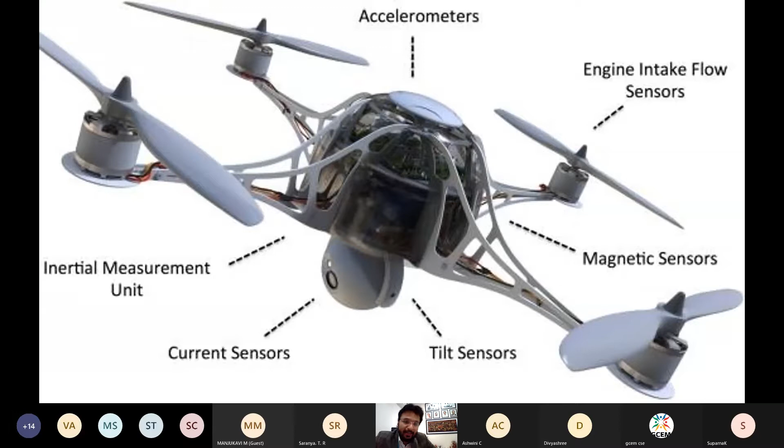Now, drones have got a lot of components in them. We will be seeing each of these components in some time, but I want you to know that it is not just what we see outside; the main components of the drone are the ones that we cannot see, that is inside the drone.

And my tryst with drones started in the year 2016; in fact, the work started in 2015, where I, I can't say manufactured because it is assembled, I assembled a few components and made a drone called seed sowing drones. This drone was launched in 2016, which had a lot of seed balls in it, especially seed balls from the Western Ghats. This drone had a camera, and from the ground station I could find out the exact location below. The camera would take the pictures and videos and send them.

And if the land was barren, then I used to just press the controller and the seeds used to drop there. Since the seeds were dropped from a height, they would penetrate about 5 to 6 centimeters inside the ground. And the seed balls were made up of seed, red clay soil, cow dung and cow urine. So this was a natural fertilizer and manure kind of a thing. And the plants used to grow really well because I had the map through which the drone used to traverse. And I used to send the drone once again every 15 days and take videos so that we could monitor how the plants that were sown were growing.

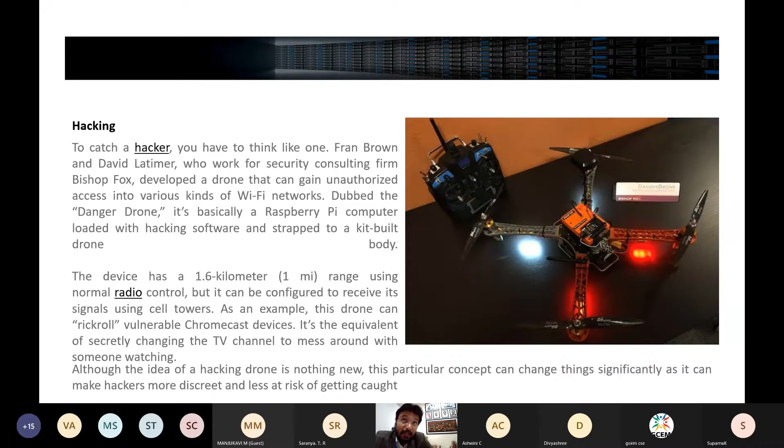So what it does is it sends reset packets, and when they are sent in the Wi-Fi network, whichever network you're connected with, you just get disconnected. And these people used to show a fake SSID, a fake Wi-Fi name, and they used to make people get connected to the Wi-Fi network, which was not encrypted. So anything that the person was doing by connecting to the Wi-Fi network, the drone used to capture the details. So this is how it is done in many places. So the drones can give a Wi-Fi network to a large area and steal the information.

And as you know, drones these days have also been procured by the ISIS. So the ISIS have started using drones, and recently, I don't know if you have heard of it, but in Saudi Arabia, in one of their biggest oil wells, drones came and they just attacked, and half of the oil wells was destroyed. So warfare drones are being used, and even for robbery.

See, for example, you have left your bag somewhere, a drone can come and just pick that bag and go. So pick and drop drones are available. These days they are assembled by high school students also, because we conduct programs for high school students, for PU students and degree students. Now the high school students identify how to assemble the drones, and pick and drop is one of the basic experiments that they do. So this way burglaries also can happen.

And you know that there are certain zones over which the drone should not fly. These are called no-fly zones, or restricted airspace.

But still, you can get some Chinese drones which do not oblige to these no-fly zone restrictions, and they can fly, they can capture sensitive data and things like that. And also, whenever a raid happens, a drone can come and it can spray pepper spray, or it can put some fog somewhere, and it can make sure that the accused can escape. So a lot of things.

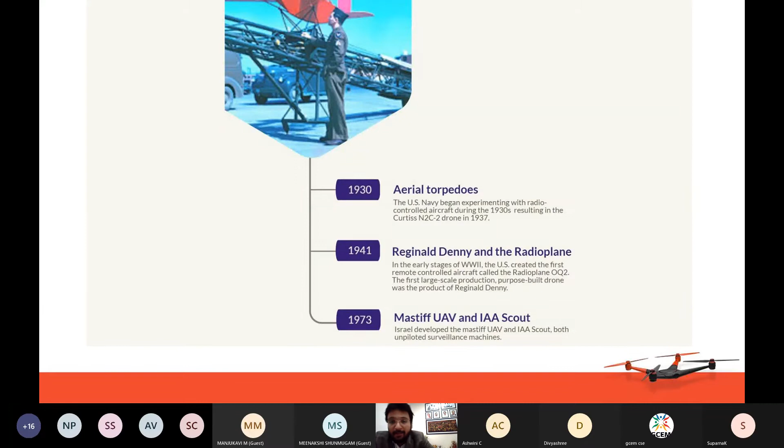Then the first major American unmanned vehicles were in 1916. Then the aerial torpedoes came. Then the Mastiff UAV came. In 1982, the battlefield UAVs came. So 1986 is where the reconnaissance drones came. Reconnaissance is a way in which you gather information. It was a joint project of the US and Israel, where they started gathering data.

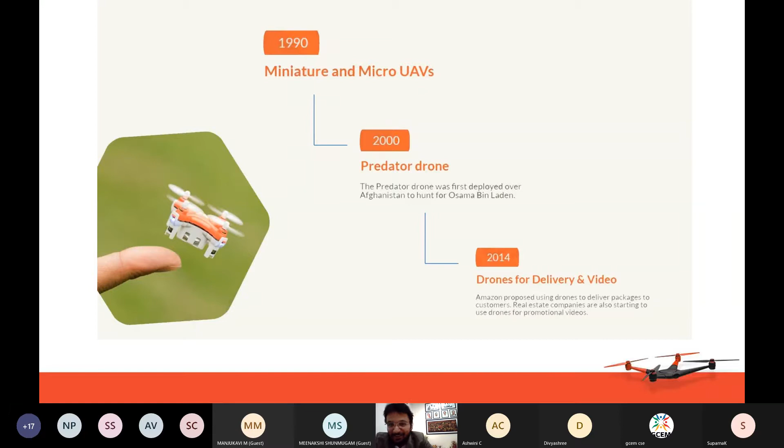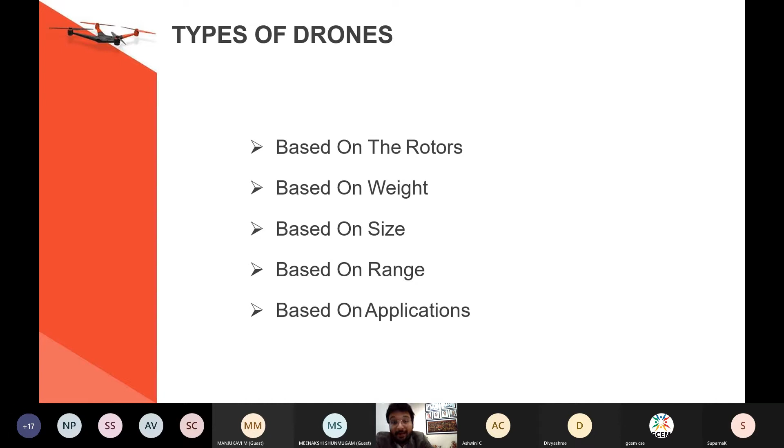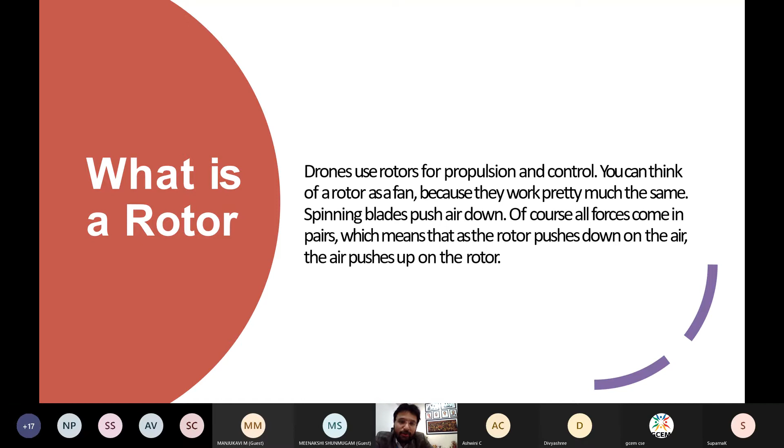But first, you need to know how drones are classified. They are classified on the following aspects: how many rotors they have, what is their weight, size, range, how far they can go, and what are the applications. So what is a rotor? A rotor is basically for propulsion and control. It's a fan. Usually the drones that you see have got 4 rotors, which some people call fans. They create thrust and make sure that the drone takes off.

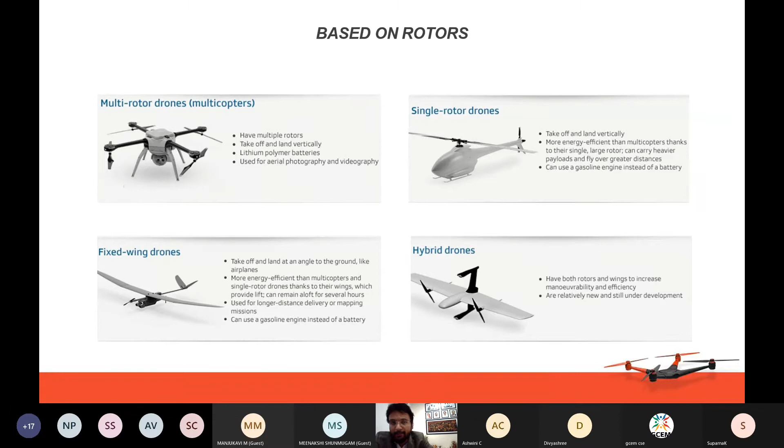Now look at these multi-rotor drones. You have drones with many rotors, single rotor, fixed wing drones, hybrid drones. Hybrid has a wing as well as a rotor. These are classified based on rotors. Then you have the ones based on weight: less than 250 grams, above 250 grams, less than 2 kilos, less than 25 kilos, and finally greater than 150 kilos. So these are the types of drones, especially in India.

Below 250 grams, you do not need a unique identification for the drones, and above 250 grams, you have to register on the Digital Sky platform. There is a platform in India called Digital Sky. So if you are using drones, it is better to go to the Digital Sky platform and register. Otherwise, your drones will be confiscated.

And based on applications, the drones can be mission drones, like military or civil, can be based on flight zone, that is indoor or outdoor, or based on environment: whether it goes underwater, on water, ground, air, space, things like that.

So these are the different types of applications, and finally based on size. You have very small, medium, and large. Very small is anything between 1 to 100 centimeters. Then you have the small UAVs, the medium UAVs, and the large ones. So this is on the basis of size. In meters, that's lesser than 1 meter, lesser than 10 meters, and lesser than 20 meters for the large ones.

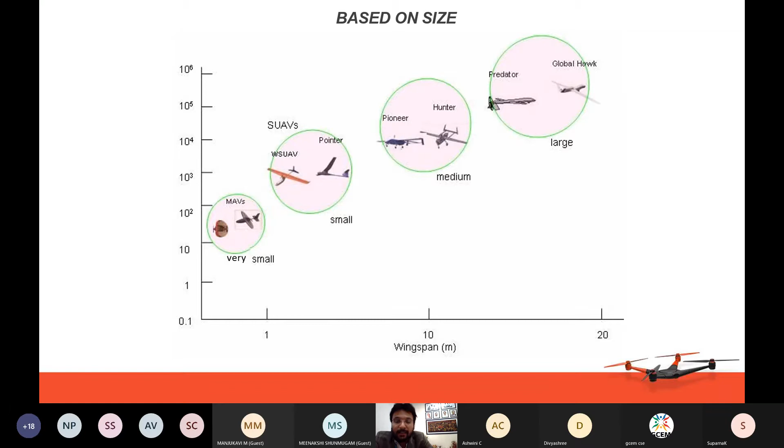I just wanted you to know how fast drones can fly. The ones photographers use, the DJI Mavic, fly about 42.5 miles per hour. The Stigg, one of the fastest drones, is about 128 miles per hour, roughly 200 kilometers per hour. You can just imagine the speed at which these drones fly. Usually the ones used for photography are about 40 to 45 miles per hour.

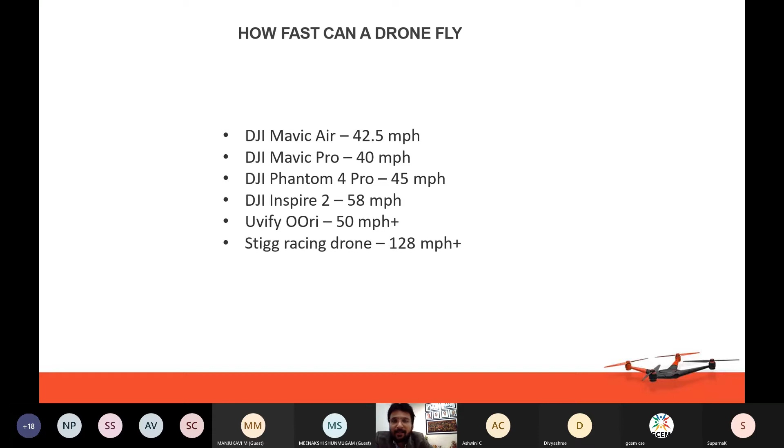These drones also have different modes. One is the normal flying mode, and the other is called the race mode, speed mode, or sports mode. Once you put it on sports mode, they behave totally differently, more like a race car that you need to control. So drones are fun to fly.

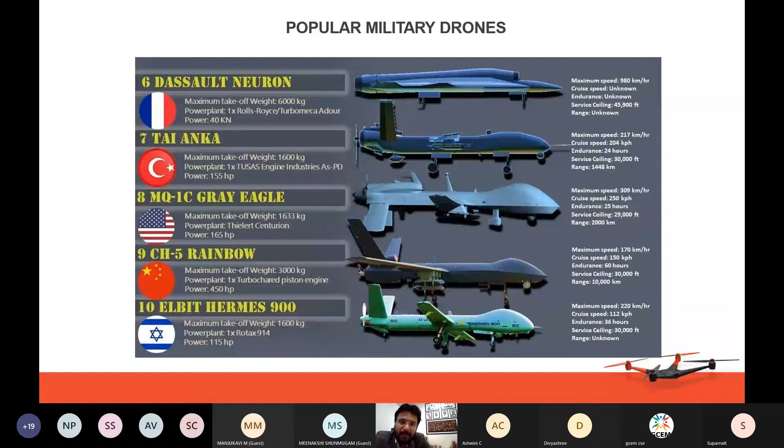Some of the most popular, fastest drones are the Dassault Neuron from France, which flies at 980 kilometers per hour. You can imagine the speed at which these drones fly. Unfortunately, Indian drones are not among the top ones. I hope and pray that we will have some of our own drones very soon. You have the Israeli Hermes drones, the Chinese Rainbow drones, Turkish drones, and the Gray Eagle drones and things like that. So many different drones are there. 980 kilometers per hour currently is the Dassault Neuron, one of the fastest drones.

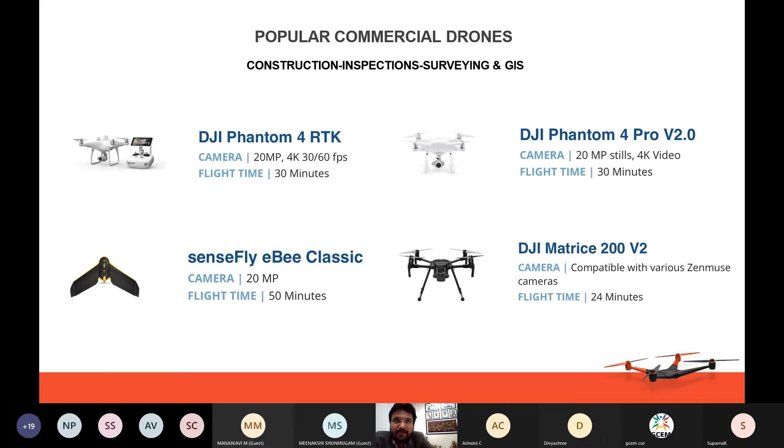Some of the drones used for commercial purposes like filmmaking are the DJI Mavic 2 and the Skydio. For construction inspections, earlier the contractor used to go up and come down every time, but now you don't have to do that. You can send drones to take pictures, reconstruct the site, check if things are fine, and even check whether the alignment is proper. You also have drones for indoor inspections like Flyability's Elios. For agriculture, drones are used for pesticide spraying, seed dropping, and checking for weeds. So there are many popular commercial drones.

Now the point here is, why do drones fly, or why does an airplane fly and cars don't? If you've sat on an airplane, before takeoff the plane goes about 100 to 150 kilometers per hour, and then it just takes off. But why don't cars take off when they go at 100 to 150? That's because of aerodynamics.

Usually cars are designed so that they don't take off, they don't get lift. They ensure the downward force is much greater, which is why the car stays kissed to the road and doesn't fly. Some fast cars, the race cars you must have seen, also have a special component at the back called a spoiler, and many put spoilers just for fun or just to make the car look aesthetically brilliant.

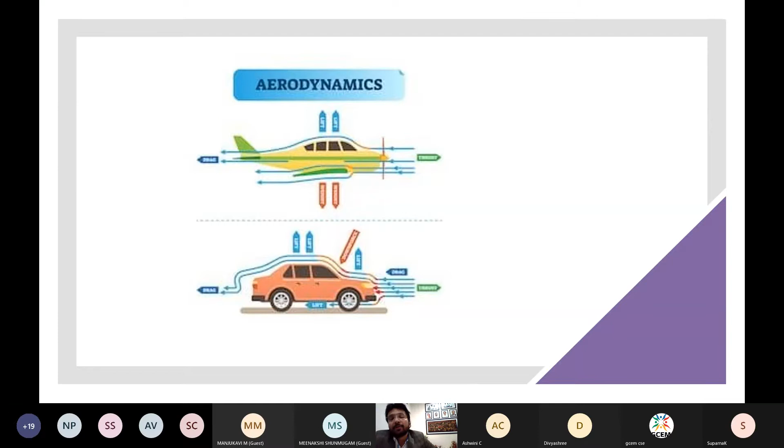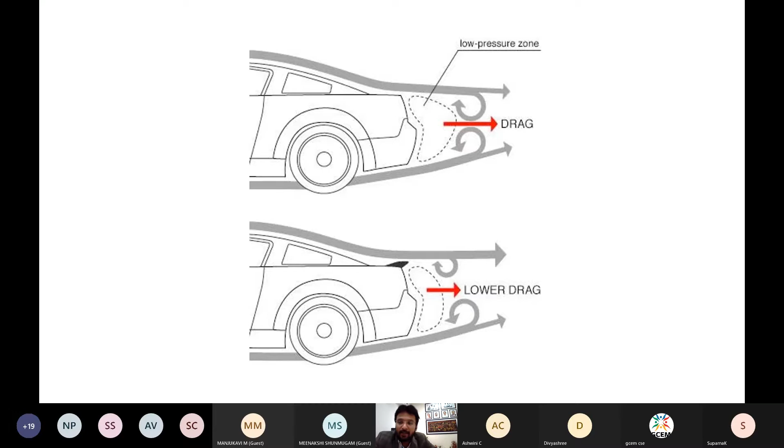Usually the spoilers are there so that the car does not fly at top speeds. So what we are basically doing is trying to lower the drag by the design so that cars don't fly.

For any airplane to fly, we need four forces that need to be balanced. The thrust which the engine generates moves the plane forward, and when it moves forward, there is a resistance by the air, which we call drag, that moves backward. As the plane takes off, the force is called lift, and the gravity that puts it down is called weight. So basically four forces: thrust, lift, drag and weight.

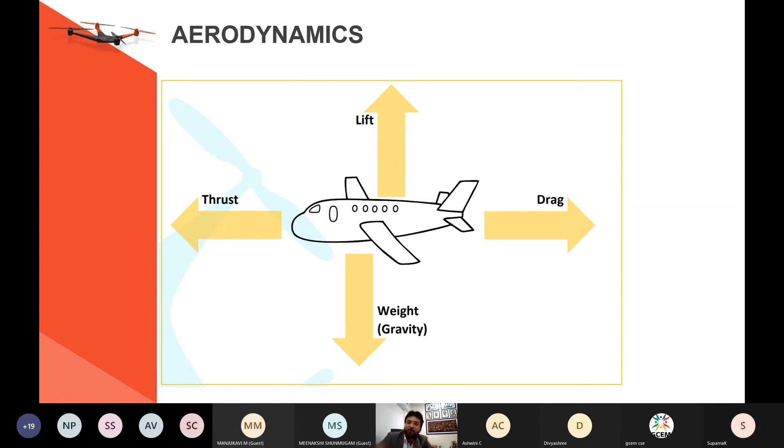I won't be getting into the details, not a physics class today, but I wanted you to know that only when these four forces are in equilibrium will you have flying. The same things are managed just with the use of rotors in drones. The forces remain the same because the laws of physics do not change whether it is a helicopter, an aeroplane, or a drone. But all these things are done just with the propellers.

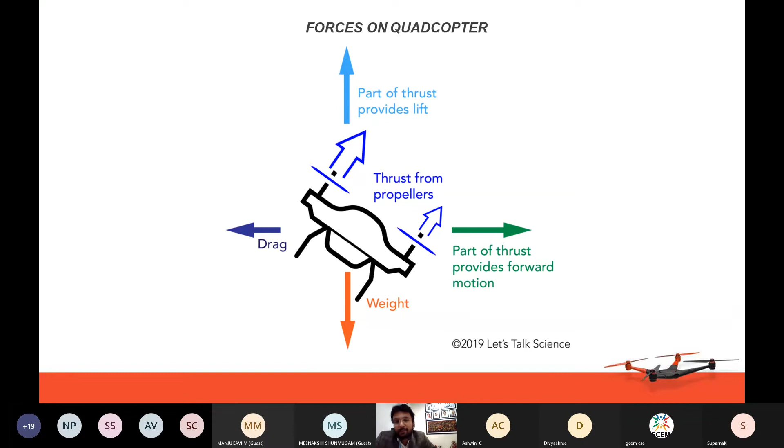The point here is this propeller is not only used to take the drone up, but the same propellers, just by their rotation, direction of rotation, and speed of rotation, can make the drone move left, right, backward, up and down. So all these things are possible just by the propellers. I want you to know the movements of the drones.

Drones have three movements: one is called pitch, second is called yaw, and the third is called roll. These are the three movements in the horizontal plane. Going up and down of the drone is the vertical plane, but we are going to talk about the horizontal plane, so that is pitch.

Pitch is basically moving front and back. So the drone moving front and back is called pitch, moving forward and backward.

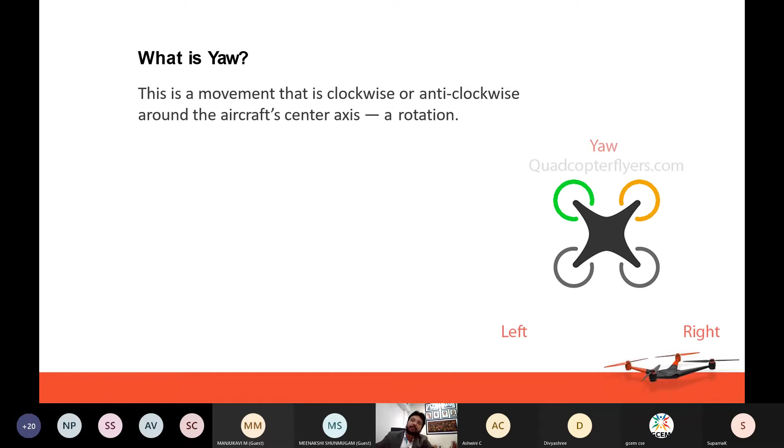Then you have yaw. Yaw is the drone moving in a clockwise and anti-clockwise direction. This is basically done in movie shooting. For example, you want to show a 360-degree or 180-degree panoramic photo, so the drone remains stationary and just rotates clockwise or anti-clockwise, taking pictures of the entire area. This is called yaw.

Similarly, you have roll, which is moving left and right. So we saw pitch is moving front and back, roll is moving left and right, and yaw is moving clockwise and anti-clockwise. These are the three movements, 3 into 2, so that is 6 movements of the drone.

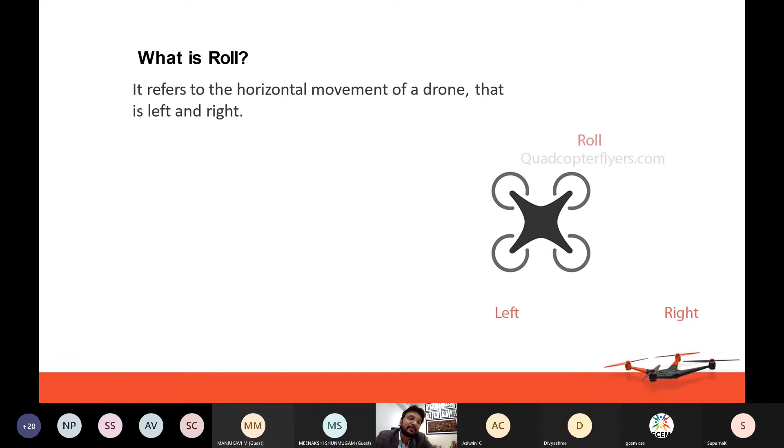When it comes to the vertical plane, as opposed to the horizontal plane we just saw, there are again 3 movements. One is going up, called ascend; one is coming down, called descend; and the third is standing still, called hover. I repeat, going up is ascend, coming down is descend, and staying there is hover.

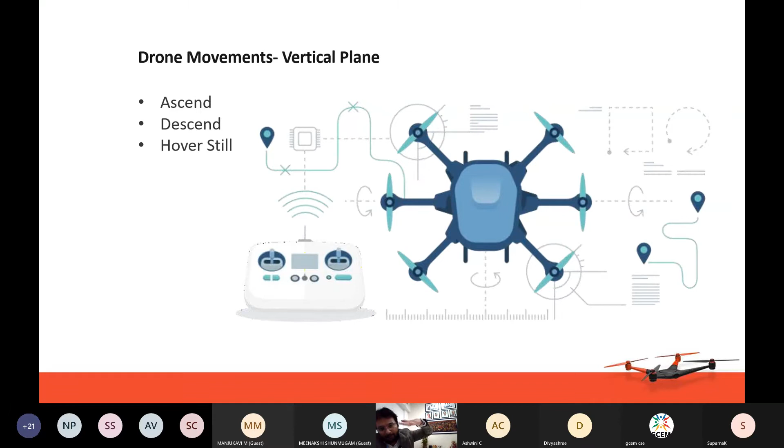You must have seen at times the drone just stops at a particular location mid-air without moving anywhere. This is called hover. So here there are some pictures which I have put.

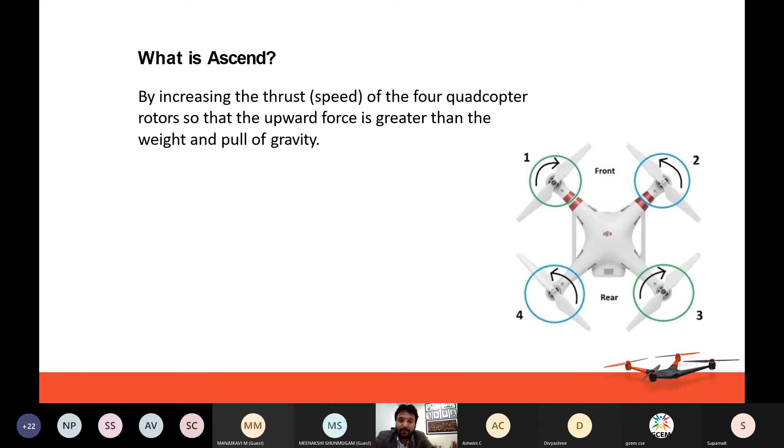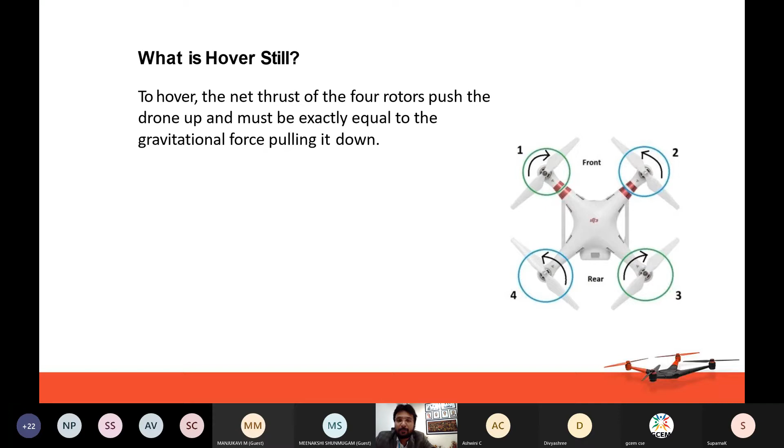For the drone to go up, the blades 1 and 3 move in the clockwise direction, and blades 4 and 2 move in the anti-clockwise direction, in such a way that the drone will go up. Similarly for descend it is the same thing, but the speed has to decrease. And for hover, again it is the same way, but all the rotors will be at equal speed. I have written the speeds too, I will show it to you.

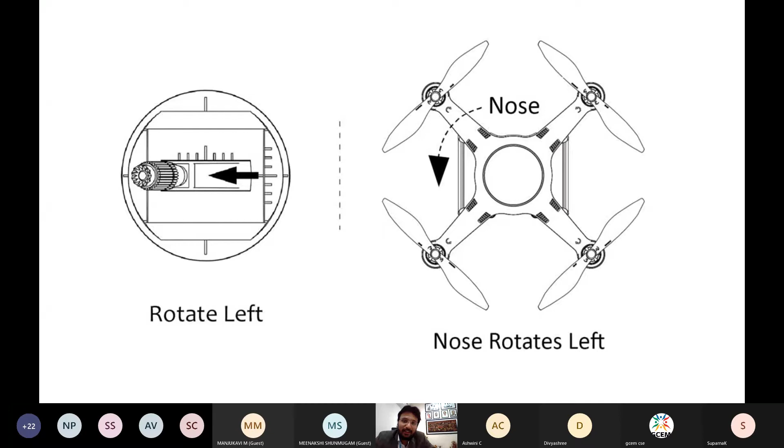You have a controller with the drone, and each controller will have two sticks. The sticks are used for changing the directions of the drone. So you move the stick to the left, the drone would move left, and you move the stick to the right, it goes to the right side. Then take the stick to the top, it goes upwards, and take the stick down, it goes downwards.

So this way you can change the direction of the drone by using sticks. Now I want you to know, for the drone to go up, down, left, right, rotate left, rotate right - all these things, the blades have to rotate clockwise or anti-clockwise, and the speed has to differ.

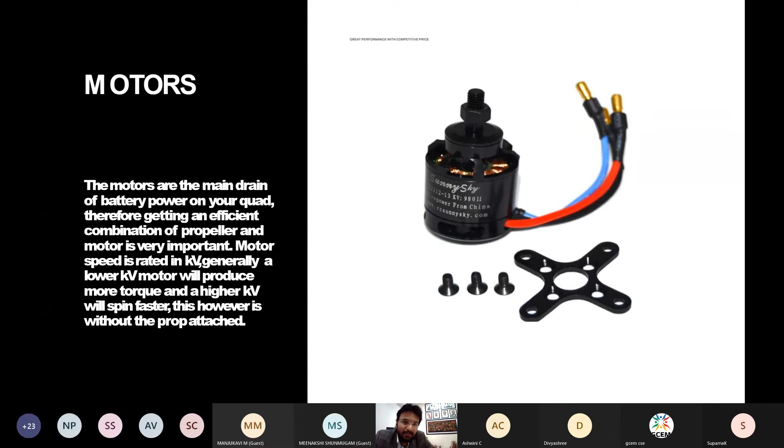Similarly, we saw earlier the different types of rotors in multi-rotor drones. The rotors are basically motors. What are these motors? In simple words, these motors are fans, and what these fans do is rotate.

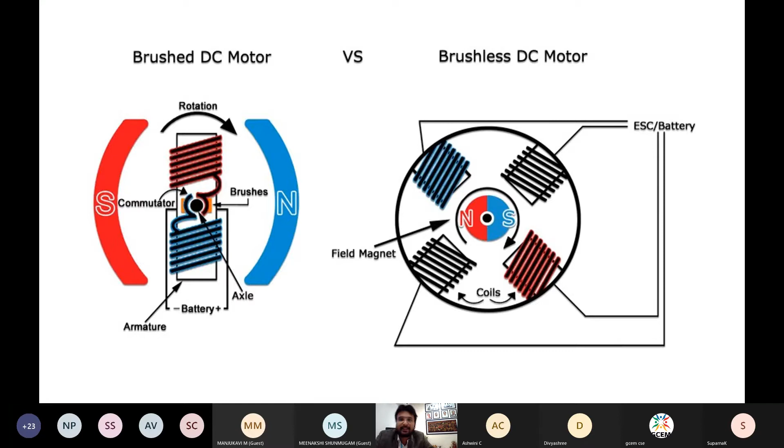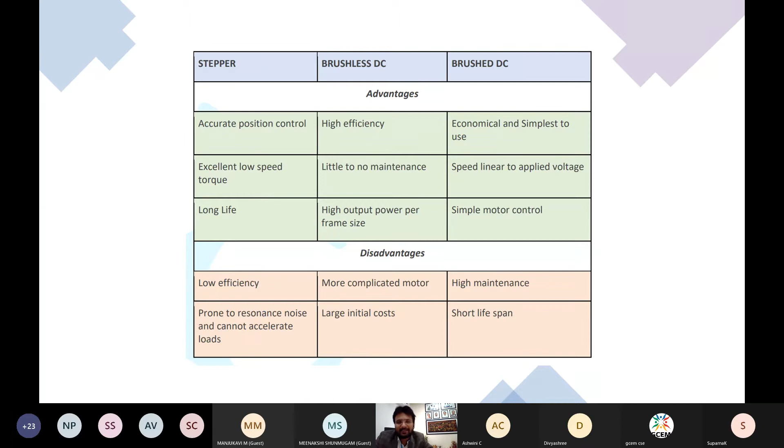There are two types of motors: brushed DC motors and brushless motors. Brushed DC motors are cheaper but wear off very quickly. Brushless DC motors are slightly more expensive and long lasting, which is why most drones these days come with brushless DC motors. The advantages of brushless DC motors are high efficiency, no maintenance, and high power output, but the disadvantages are that they're slightly more complicated and slightly expensive.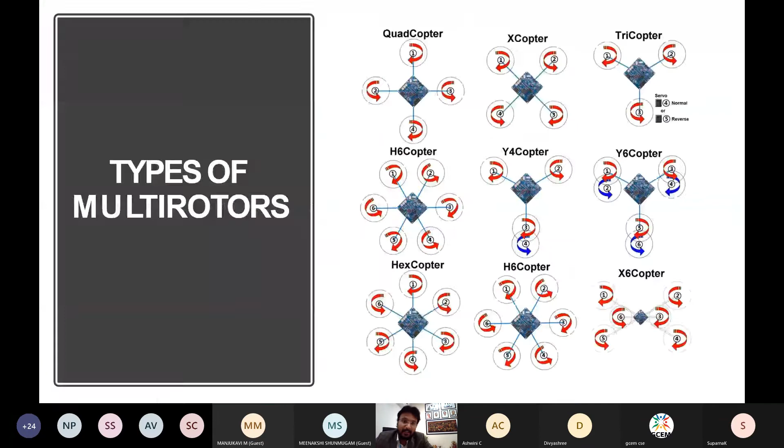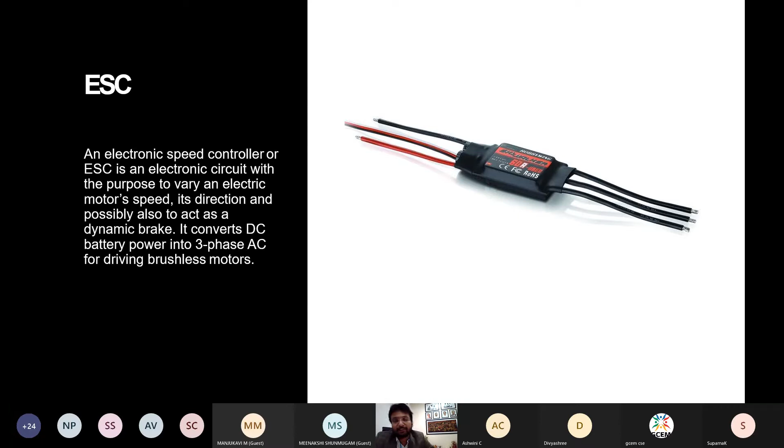Now, how does the speed of the motor change? The speed of the motor changes because there is a component called an ESC, which is an electronic speed controller, which converts the DC battery power into three-phase AC for driving the brushless motor. So the ESC is responsible for the speed.

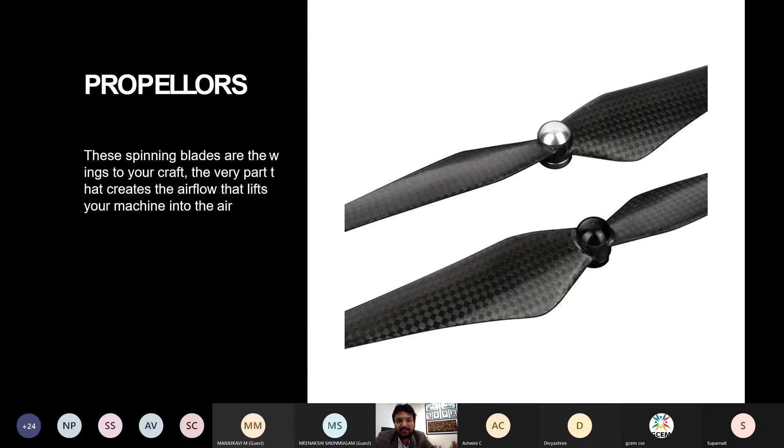Similarly, you have the propellers which are connected to the motors, which are the spinning blades of the drones. Now these propellers can be 2 inches, 5 inches, 6 inches, depending upon the size of the drone. So propellers can be either polycarbonate or nylon carbon composite. Nylon carbon composite, or what you call carbon fiber, is expensive, but they are very strong and they are much more efficient.

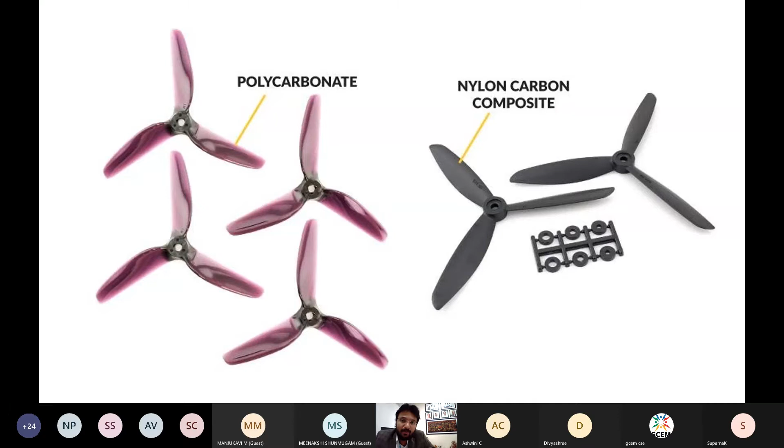Then you have the batteries. The batteries are very important because the better the battery, the more power your drone will have, and also the drone would fly for a longer time. So that is very important for us.

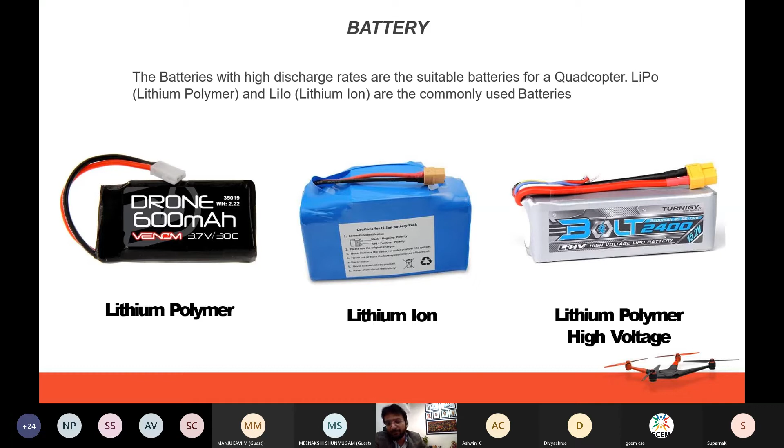For example, you want the speed. Now why do we like BMW cars, or why do we like those Audi cars? Because you hit the accelerator, it touches 0 to 100 in 5 or 6 seconds. Now why does the initial thrust come? Because it knows how to generate torque very efficiently.

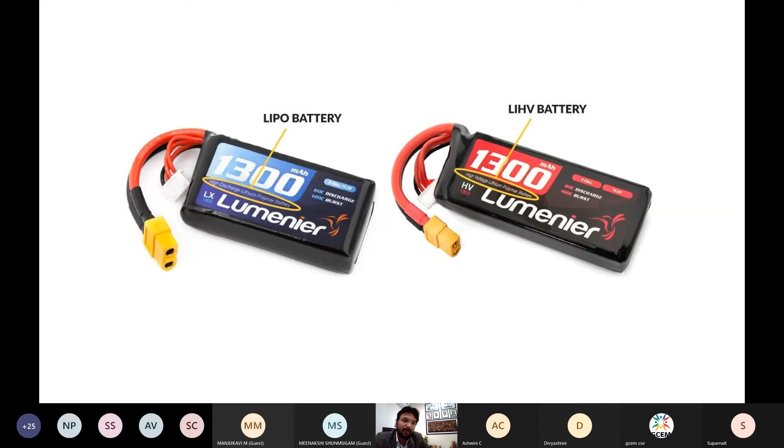So similarly, if you want more torque, if you want more Newton meter force as soon as you hit the throttle of your controller, then more power should be released to the motors, for the motors to rotate extremely fast, and more power is only released by high voltage batteries. So high voltage batteries are slightly more expensive than the LiPo batteries, the lithium polymer batteries.

So that's the difference. So whenever you are selecting a battery, you need to check how many cells there are, what is the voltage of the battery, what is the milliampere hour, and you also need to know the discharge ratio. That is the maximum power the battery can discharge. The better the discharge ratio, the more efficient or more responsive your drone gets.

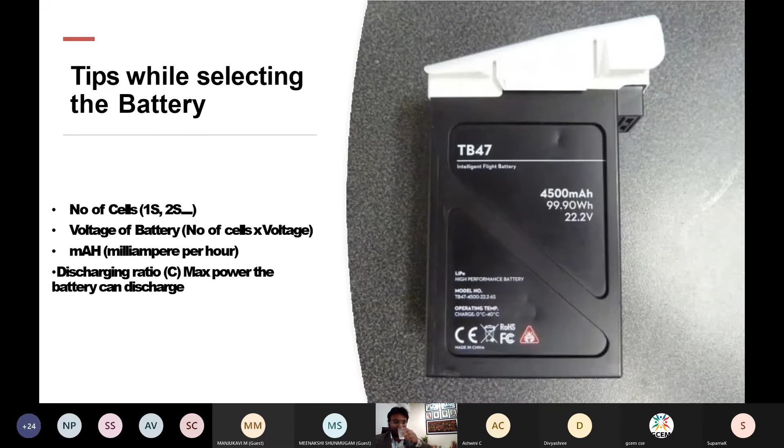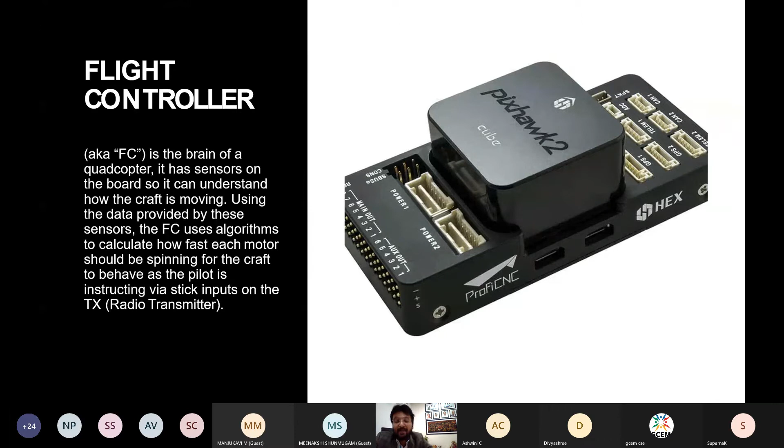Well, now you have the brain of the drone, which is called the flight controller. The flight controller is the brain of the drone, to which all the sensors are connected, and when you send some signal to the drone, it knows what to do. So who processes that? That is done by the flight controller. They use certain algorithms to calculate how fast each motor is going and how it has to behave. It takes the data from the sensors, and it decides how the drone has to fly.

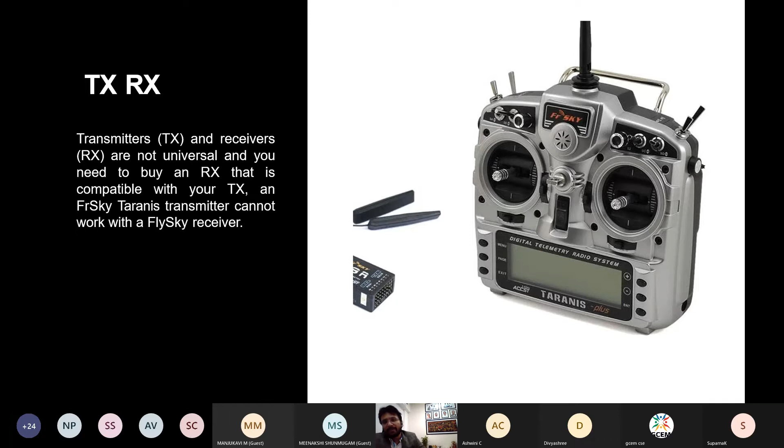And then you have the controller, which has two features: transmission and receiving. So TX and RX, and there are different types of controllers. Basically controllers are used to control the drone. We call this a telemetry radio system.

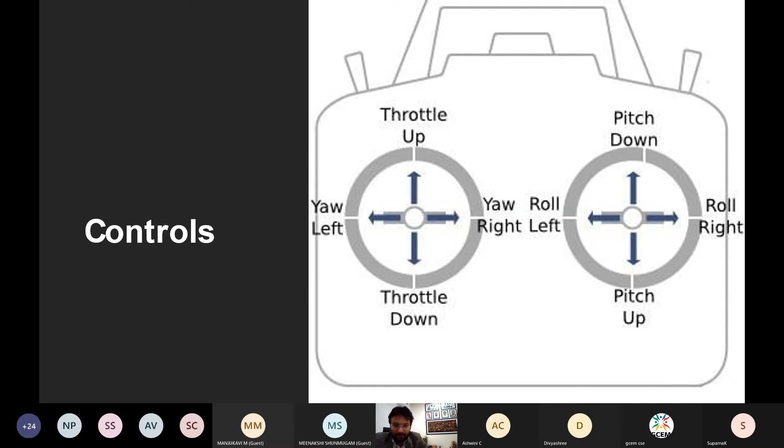Okay, and look at this. You have two sides of the controller here, left and right. The left one is used for yaw left and yaw right, and then you have the throttle up and throttle down, and roll left and roll right. You have the pitch down and pitch up. So these are the different movements of the drone, just by using the left side and the right side of the controller.

Okay. So some people don't use the regular hardware controllers, but they download software. There are many apps available which you can just download from your app store, and you can control the drone using your mobile phone itself. These are called software controllers. But when it comes to responsiveness, software controllers are slightly slower compared to the hardware controller.

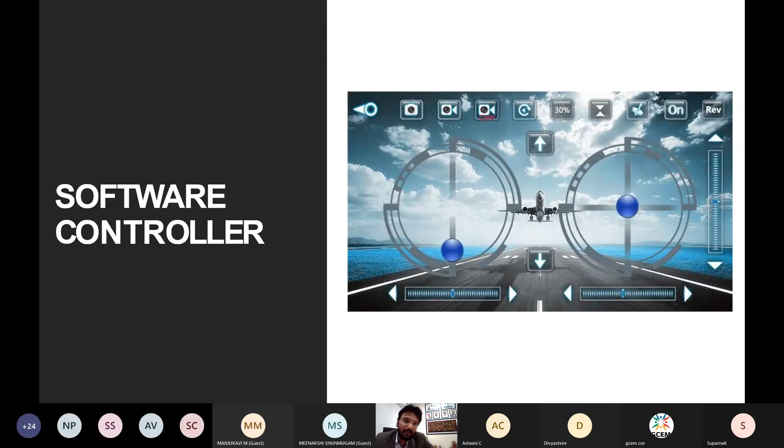And then some of the drones also have landing gears. You have fixed landing gears, you have retractable ones, which can go back when the drone is flying, and then you have water landing gears. Some drones would love to land on the water, so in that case, so that the drone doesn't get washed away, you have these water landing gears.

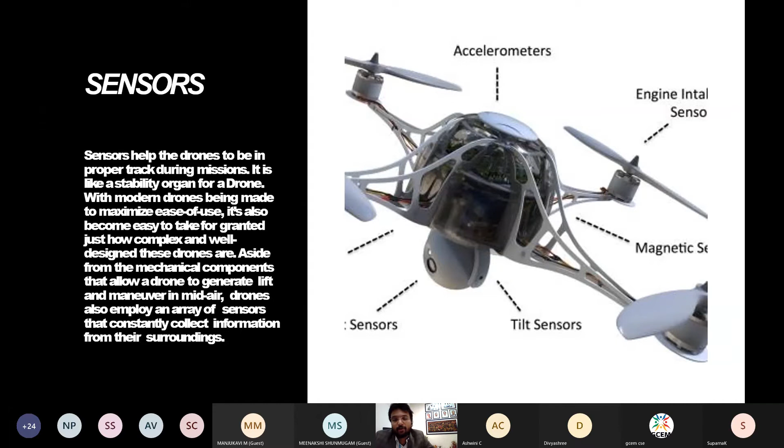And then the main important part of the drones, that is the sensors. So drones have got different sensors in them, and we will be seeing which are those sensors. Of course, they would be communicating with the flight controller. So which are the different sensors? So the drones have got a magnetometer, accelerometer, gyroscope, barometer, and the transistors. So these are basically the main components.

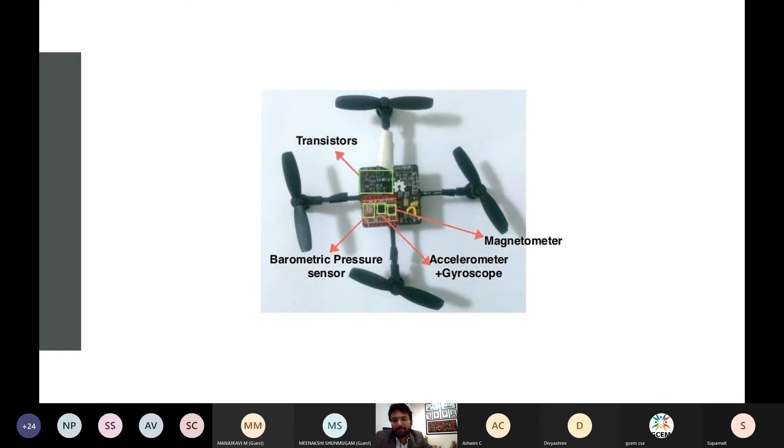Magnetometer is used to identify which is the magnetic north of the earth, so that the drone knows whether it is flying east, west, north, or south. So the drone basically identifies the magnetic north and it goes. Then you have the accelerometer and the gyroscope for the tilt, the barometric pressure sensors to identify how much pressure is there.

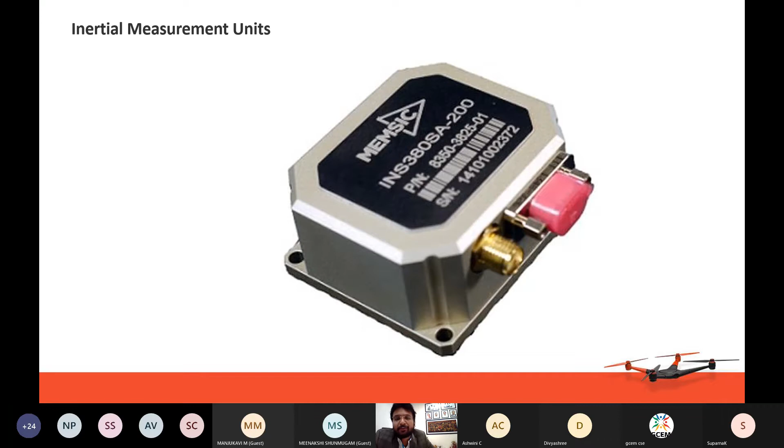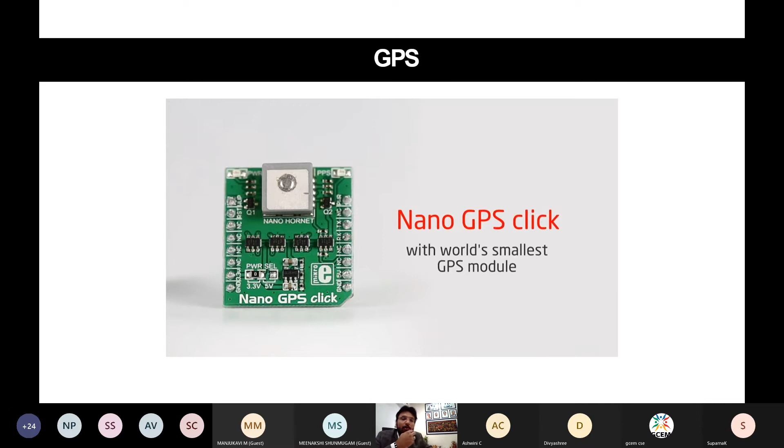So all these things are clubbed together and put in one single chip, which is called as IMU, the inertial measurement unit. Okay, and then drones also have got GPS in it. So the nano GPS chip is there. What it does is it identifies the exact precise location. So GPS based drones know where they are, and also, if pre-programmed, they know where exactly to go.

And these days you also have the IRNSS. It's a very proud feat for India, which is the Indian Regional Navigation Satellite System. So the other day we had a few of the scientists from ISRO who had come to meet me, and they in fact gave their IRNSS, that is the NAVIC chips. NAVIC stands for Navigation with Indian Constellation. So the NAVIC chips were given, and usually the drones we used to put them with GLONASS or GPS chips.

And we recently put the IRNSS because all the 7 satellites are in orbit. So we put the IRNSS chip in our drone and we flew them, and they were brilliant. But the only flip side is IRNSS chips work only within the Indian subcontinent. You cannot use them in some other continent.

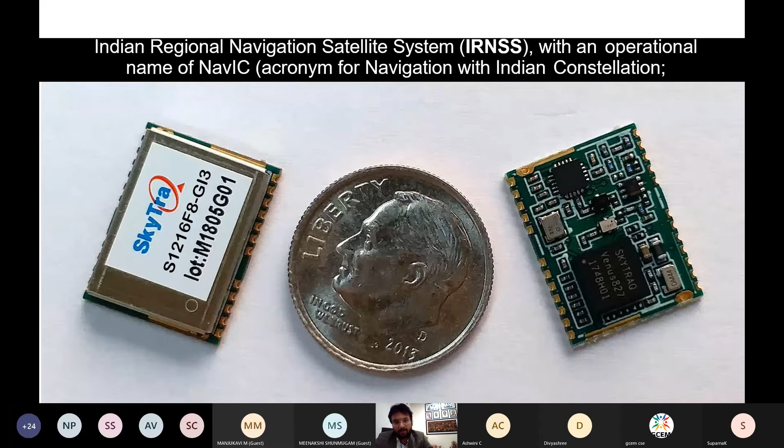And then you also have a range finder, which can be used for identifying the obstacles. You must have seen some drones. You take the drone and you just throw it in the air, and if there is a wall nearby, it would never go and hit the wall. As soon as it reaches near the wall, it would just come back as if it's a magnet that is repelling. You know that north and north, if you get them together, the magnets would just repel. So these are called as the range finders.

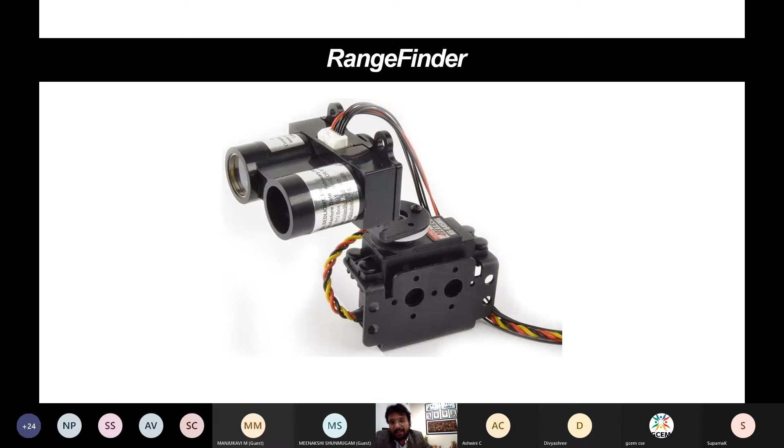So the range finders or the obstacle avoidance can be either infrared, or it can be camera based vision sensors, or it can be ultrasonic. Some also use a lidar, some also use monocular vision and things like that. So obstacle detection and avoidance is very important. These cheap drones that usually we fly for recreation, about 4,000, 5,000 rupees, usually don't have these chips. But if you go for a good DJI or any of the good drones, then yes, obstacle avoidance, collision avoidance and obstacle detection becomes normal.

And also, most of the drones would also be having an external device which is connected to it, which we call as a gimbal. Some call it gimbal, some call it gimbal, but anyways, how you call it doesn't matter. You just need to know what it does. So the gimbal, basically you connect it to the drone, and it is a three-axis stabilizer.

Three-axis stabilizer means when your drone flies, there would be a lot of vibration and a lot of movement of your camera. But if your drone has got a three-axis stabilizer gimbal, then automatically the videos that are recorded are so smooth that they look cinematographic.

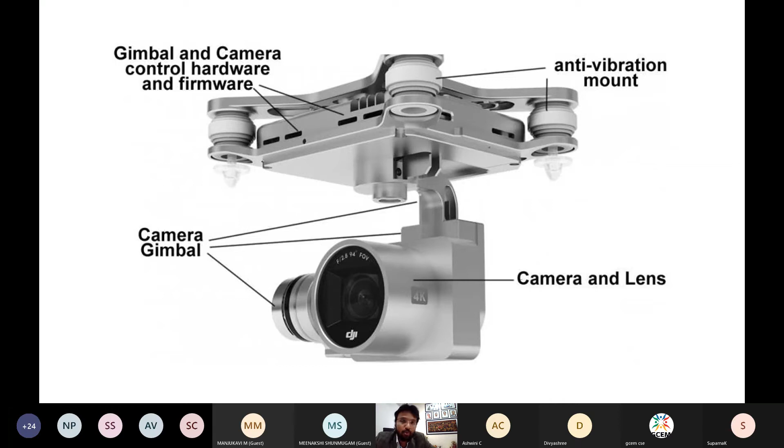Okay, and also now that the online classes have started, many teachers also would have bought this device. I have one. This is a DJI Osmo Mobile 3. So you can just connect your phone to it, and it has also got a stand. You just put it on the stand and keep it somewhere away from you. And as you move around the blackboard, it would automatically move and focus on you. It looks very futuristic, but that is how they function. So they can identify the subject and focus exactly on the subject, and if the subject moves, the camera also would move towards the direction of the subject.

So basically the three components for a perfect flight are gyro stabilization, which can be a 3-axis or a 6-axis stabilization. Then you have the flight controller. Then you have the IMU, that is the inertial measurement unit. As I said, the inertial measurement unit has got the sensors in it. So the sensors are usually the barometric, the gyroscope, the accelerometer, and some other sensors also.

Well, now you have the ground control stations. So the ground control station is a land-based or a sea-based control center, which is used to control the UAV. So sometimes, if you are flying the drone by yourself, then it is just within the line of sight. But sometimes you let the drone go somewhere else, and you need to get the first person view, FPV. So how do you get that?

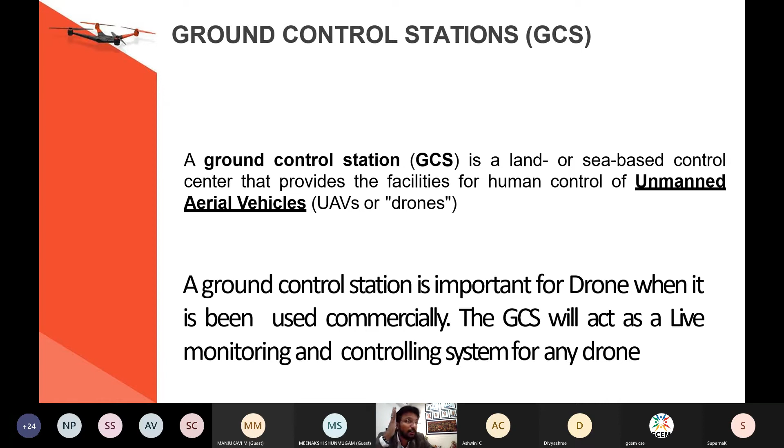You have a ground control station which communicates constantly with the drone. You get to see what the drone is seeing, and also you can control the drone as you want. If you want to call it back, you can call it back. If you want it to do certain activity, you can do that. So in forensics, even if you can get the ground control station, you can infer a lot of information.

So basically the GCS hardware is this way. They have high powered antenna, and they have a screen which can see the FPV from the drone, and then you have certain controls which can control the drone as you want. And on the screen you can also get the map that has been traced by the drone. So this is very important for us in our forensics, because we get to know where the drone has gone, from where it took off, so you know who was the person who had sent it and things like that.

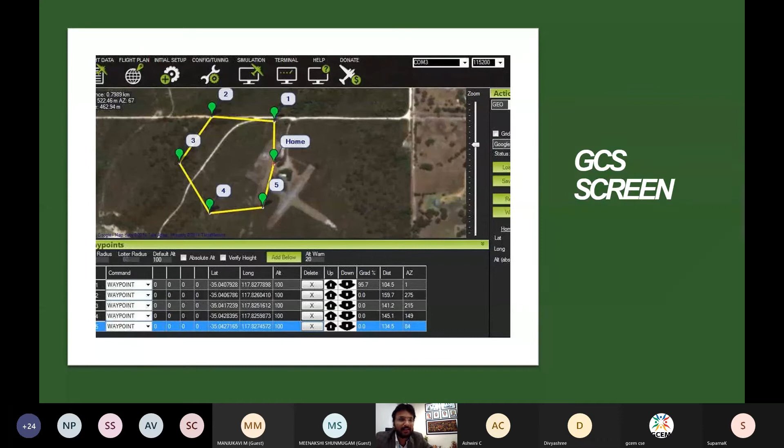So basically this is a DAT file that you can extract from the drone, and once you get that file, you can map it on a software. I'll be discussing about the software in some time. So all the coordinates, the waypoints are there. You get the lat long coordinates and you get to map the exact route through which the drone has traversed.

So basically the uses of GCS are to design the flight path, to monitor the drone, live video monitoring, to understand any flight errors, to understand the position of the drone, real-time position, and to call the drone back in case of emergency situations.

Okay, just give me a second.

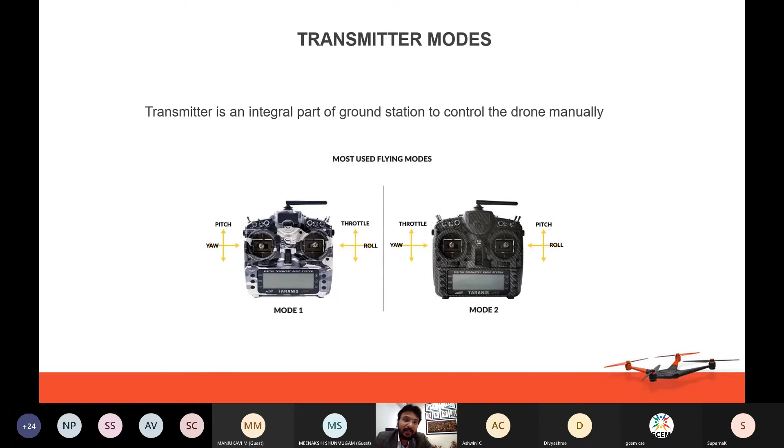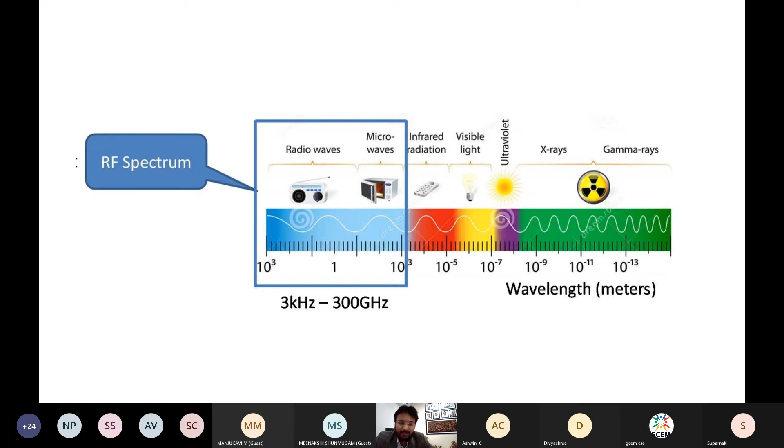So now you have the drones. We saw that you have these controllers which can be used to control. There are different modes of controlling, mode 1 and mode 2. Let's not get into those details, because usually these days the drones are controlled in the way that I had shown you earlier. But you need to understand that these controllers run on RF spectrum, that is the radio frequency spectrum, from 3 kilohertz to 300 gigahertz. Okay, so this is basically the RF spectrum through which the controllers are functional. Okay.

Well, so now let's see the different spectra. Now in the radio spectrum that we have seen, the radio waves, you have the different types of signals, UHF, VHF, HF, and things like that. So there are different drones that function at different frequencies. This is a branch which is called telemetry, which deals with how much bandwidth is needed and what is the distance of communication between the controller and the drone. So we use different frequencies.

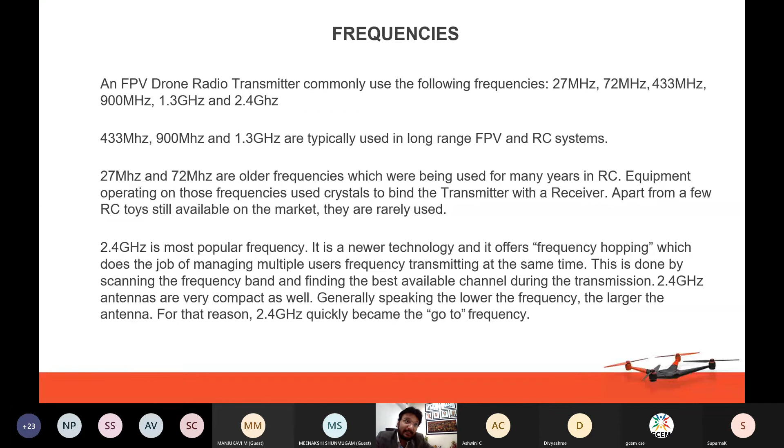As you know, the lesser the frequency, the distance traveled is more, but the communication data is lesser. So more the frequency, lesser the distance, and more the communication data. That same concept is used in your mobile phones also, where if you have a 900 spectrum, then you need just one tower instead of two, because it can traverse a very long distance. But when it comes to 1.8 tower, the distance traveled is lesser, but you can get more connections, you can have more bandwidth. So basically the same concept is used, and I said this is called telemetry.

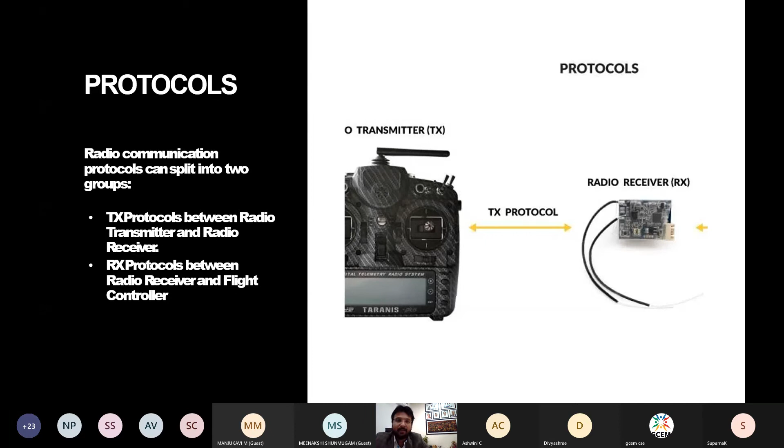So telemetry is the data transmitted from the radio receiver back to the radio transmitter. So this is how it is. There are different protocols that we use. The drone would be having a radio receiver, that is RX, and we transmit the data from the transmitter using the TX protocol. Okay, so now let's see what are the different types of flights that are there.

So there are three types of flights. First one is you control the drone. This is called manual. Another one is the drone knows what to do, but still you control it. This is called semi-autonomous. And last one is totally autonomous, where you don't control the drone at all. So this is called autonomous. So basically there are three types of flights: manual flights, semi-autonomous, and autonomous flights.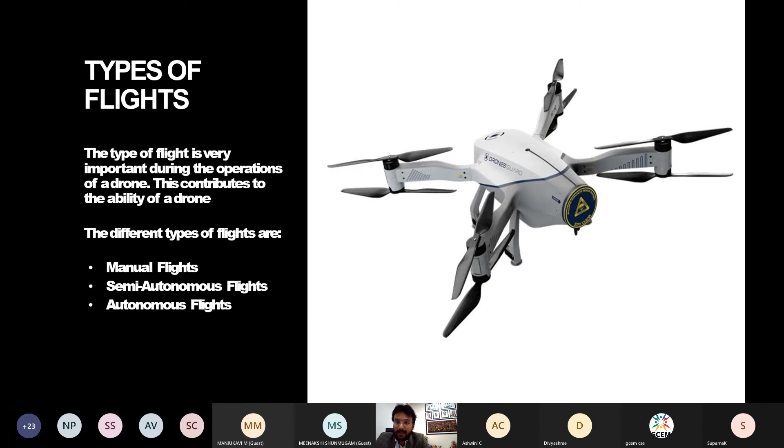All right. And these days you have programmable drones. Even kids these days are using them, because you have some very interesting tools which can be used to learn programming, and you can see the program that you have written getting executed on the drone. For example, you can have a drone that can identify colors, a drone that can go through a certain path, a drone that can pick certain objects, things like that.

So DJI Tello is one of the popular drones that I use, which can be used for programming. And the most common language used for programming is Python. So if you're good in Python, you can program the drones.

So now we are coming to the detection part. Detection means the technology that is used to detect drones. For example, let us assume that the chief minister is going to address a gathering, and suddenly a drone comes from nowhere. Would the law enforcement agencies be able to detect that drone? So that is the whole point.

One is detecting the drone. Second is capturing the drone. Third is analyzing the data from the drone. Now, it is not enough only to detect. Once you detect, you should also be able to see to it that the drone is taken away, or at least the dangers that can be caused by the drone are mitigated. So this needs to be done.

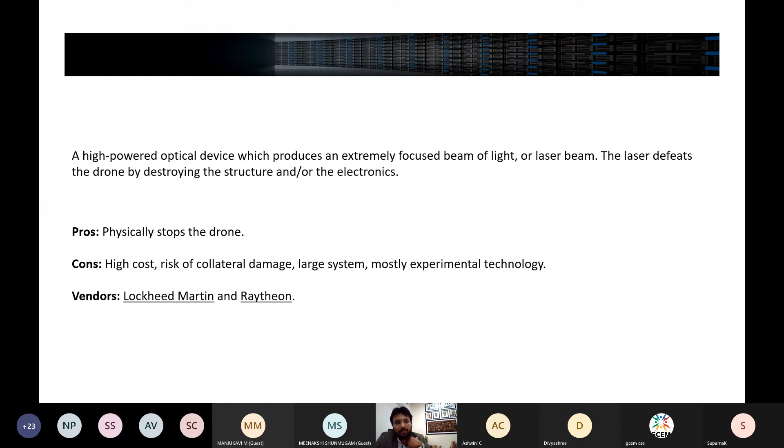So the SIM card is put inside the drone and the drone would function as per the signals that you emit from your phone, because they're connected to some cell tower. They are efficient, no doubt, but the only problem is they're slow, because these signals travel really slow from the cell tower. So not many people use GSM based drones. Not that they're not there, but they don't use them for critical applications. They prefer radio controlled drones, because they are extremely fast and responsive.

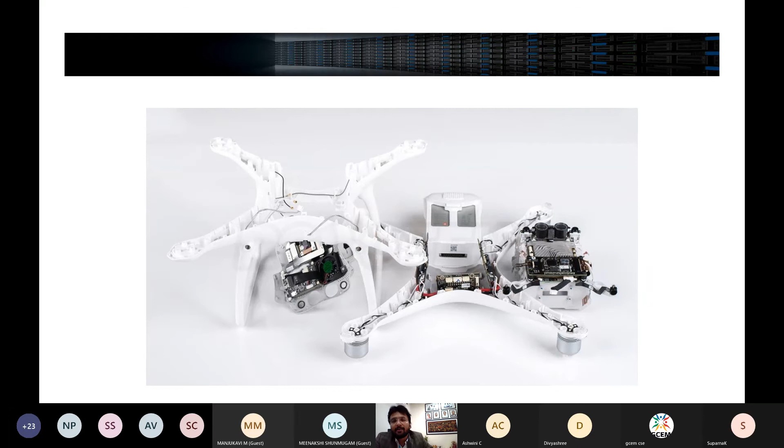So you need the right set of screwdrivers. Once you open the drone, you will get to see all these parts in the drone. Now you can see here obstacle avoidance, collision avoidance and obstacle detection sensors. You can see an IMU there. You can see a flight controller there. So once you tear down the drone, you get the various components in the drone.

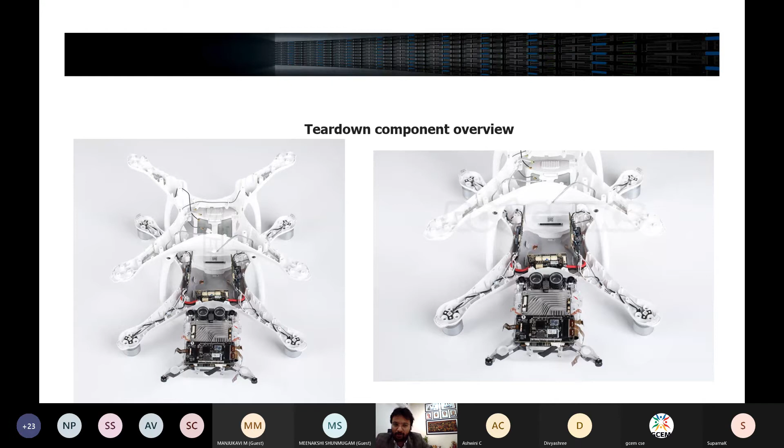Okay. Once you get the various components, the drones, once captured, shall be handled carefully. Please don't go and do this, because today I'm just giving you an overview of the whole thing. I'm not telling you in detail, because in 1.5 hours there is nothing that I can tell in detail, but you would just have an idea about what I'm talking about. All right. So you will be using your basic knowledge in order to take that. Okay, just give me a second.

So what you're going to do is make sure that the drones are cleaned properly, because the drone has fallen down. Then check the connections with a multimeter for any short circuits, because if the battery is exposed and touches the flight controller directly, a short circuit can happen. So take a multimeter and check for short circuits, differentiate between working and non-working parts, and secure the storage parts and clean them thoroughly without damaging them.

Once that is done, you can recover information. What are the things you can recover? You can recover the serial number, the MAC address, the IMEI, and the IMSI. You can also get the version number of the firmware, and you can also get metadata.

Metadata includes things like waypoint logs, GPS signals, and from where it was launched. You can also get geolocation information for critical locations like launching, landing, and the return to home. All drones have something called return to home, RTH, which means in case the signal is lost or there is a malfunction, it needs to know where to come back. You need to specify that location so it can return, because these days they don't allow you to fly a drone without the return to home feature. So if return to home is enabled, you know where it is going back, and most of your problems are solved because you get to know the location.

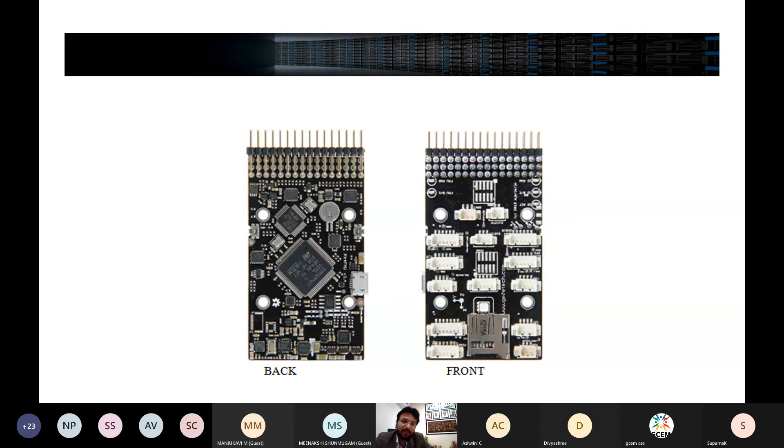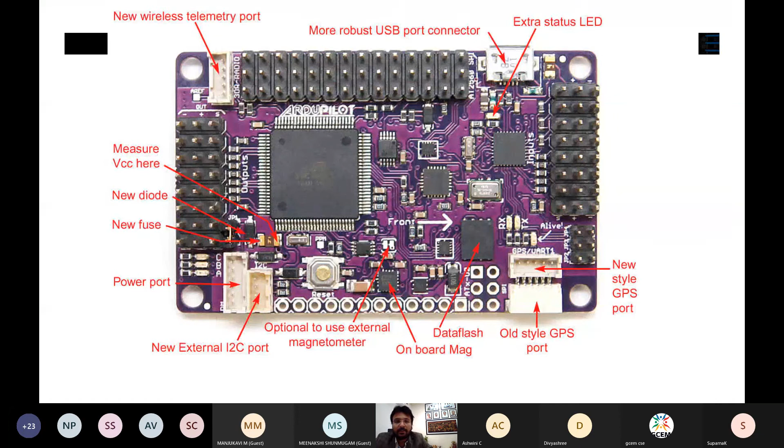Then you take the flight controller out, and from the flight controller you can see these different parts of it. You can connect them and try to get more information out of this, because it would be having the memory. Even if the flight controller is not working, you can use certain techniques called JTAG or chip-off, and get some more information out of it.

Some of the software we use: one is ArduPilot, which is very nice. Then you can use PX4 Autopilot - that's another software. You also have Beta Flight, Clean Flight, and LibrePilot. These are some of the software used for analysis, and not all of them give the same data.

In some you get different results, so what we usually do is use 3-4 software, connect that particular drone to all 4, collect the data, and then compare - we see what information is matching, not matching, or what newer information we can get. Some tools used for analyzing are Mission Planner, Q-Ground Control, Drone Plotter, DATCON, etc.

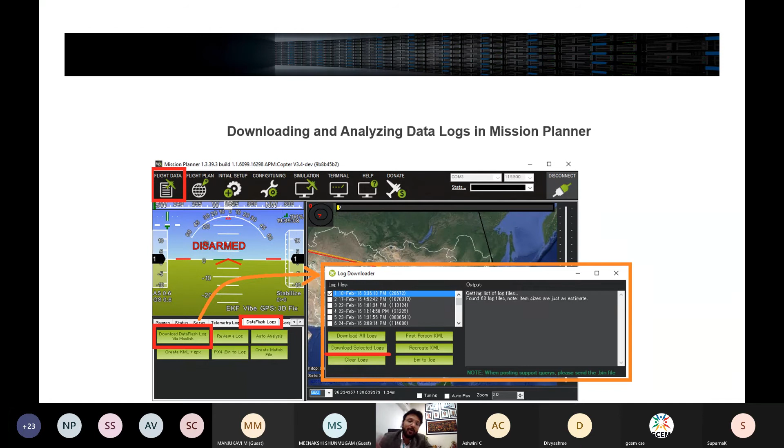Once you download the information, the data flash logs are stored on the autopilot's onboard data flash memory, and can only be downloaded after the flight. Once you download them, you connect them to your software, and it gives you the exact flight path of the particular drone, where it has traversed, in Mission Planner. You go to flight data, upload that DAT file, and you get the exact location through which the drone has gone.

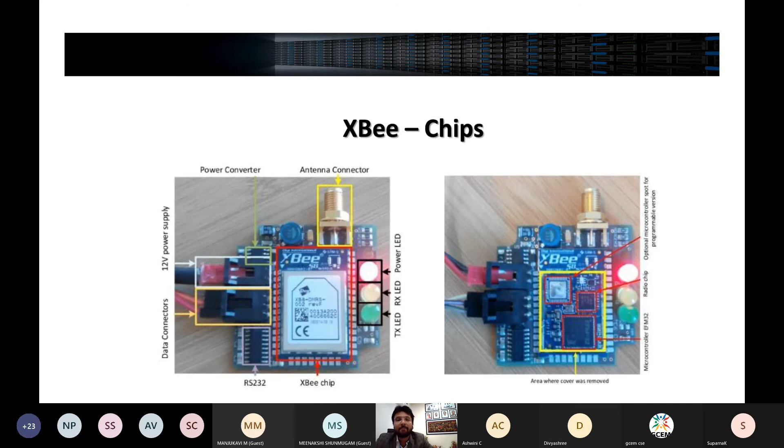I wanted to show a demo analysis, since usually we show it practically, but here it's not possible for me to show you. Maybe sometime I'll invite all of you to visit me if you come down to Mangalore, because we've got a setup here, and I'd be happy to show you the various attacks that can be carried out on drones.

We use a man-in-the-middle attack. So you have the controller and you have the drone. We use this attack to take control of the drone away from the ground control station or the remote controller, and we can start controlling the drone ourselves. These are some of the techniques we use to get information from drones.

These attacks would hardly cost about 3,500 rupees, but they only work if your drone is not properly programmed or not good enough. Taking control of drones is very easy. So when you fly drones, especially over my house, you need to be careful, because you might not get your drone back, as I can probably take control of it - on a lighter note.

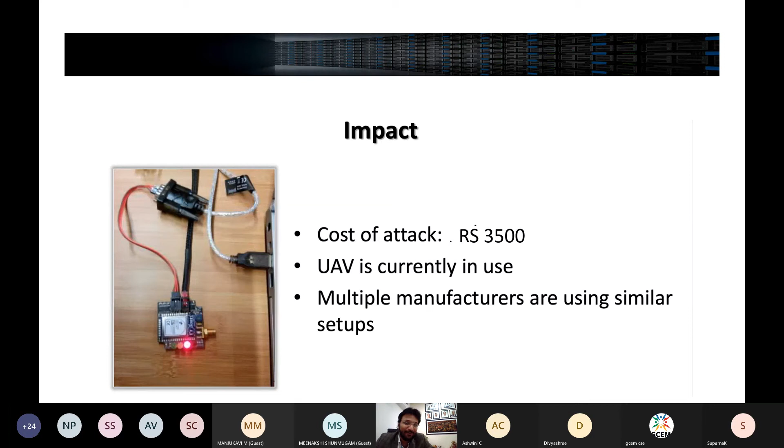The lessons learned from this are: we need to use strong encryption, this is very important; we need to alter the passphrases; and we need to test our product regularly. Also, whenever patches are available, we need to apply them and ensure no vulnerabilities are left open.

So, 10 things to know before taking off your first drone: start small, fly in open spaces, make sure there are no buildings nearby, read the entire manual, and it's better to use a flight simulator first and try flying it there before flying the actual drone. Inspect your drone, check the battery, and respect the weather - if it's raining, don't fly unless you have a waterproof drone, and those are very expensive.

Learn the laws of the drone - you can go to the Directorate General of Civil Aviation, DGCA website, and download the laws that apply to drones. Also, have the latest firmware installed, because if you're using outdated firmware, the chances of being hacked are higher. And then, don't be afraid, have fun.

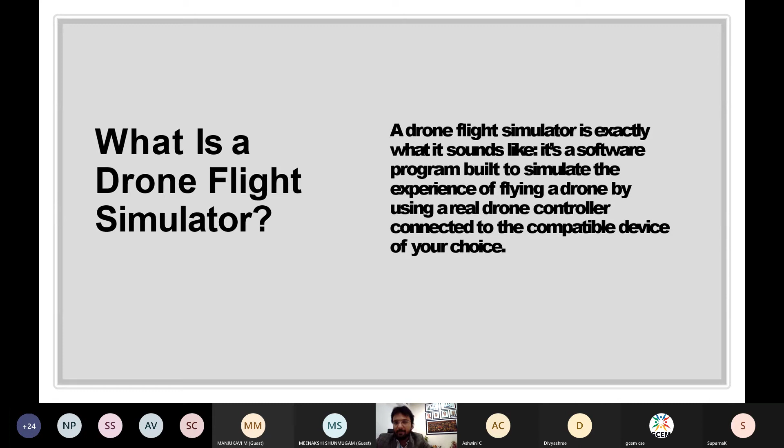So what is a flight simulator? It's exactly what it sounds like - a software program used to simulate flying a drone. You use a real drone controller, but you see it on a computer screen. You can use the DJI flight simulator, which is one of the best, and it also lets you check whether the drone is properly aligned. We call that process calibrating.

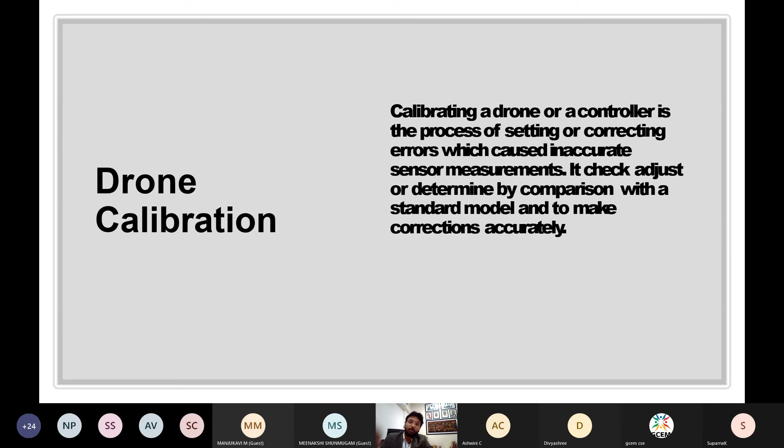Calibrating is setting or correcting errors caused by inaccurate sensor measurements. Just before flying the drone, there's a button called calibrate - using it makes the drone properly calibrated. It's just like GPS - sometimes when using GPS it asks you to draw a figure 8, and that calibrates the GPS inside your phone. This is called calibration.

And if there are still some errors, we can use trimming. DJI Flight Simulator is one of the best simulators I've used - they're very nice. Similarly, Zephyr, Drone Sim Pro, Phoenix, Real Flight, and Quadcopter are also available - many simulators out there, but DJI is good, and that's the one we usually use.

If you're using a drone in India, it's recommended you go to the Digital Sky platform, digitalsky.dgca.gov.in. You can register your drones there and download the drone laws. As I said, below 250 grams you don't need a license or a UID, but you can't fly the drone above 50 feet. If it's above 250 grams, you'll have to register the drone, otherwise law enforcement agencies can come and confiscate your drones.

So, drone laws and policies: all drones except the nano category must be registered, and a permit is required for commercial drones and to fly above 50 feet. Drone pilots must maintain a line of sight, and drones cannot be flown more than 400 feet vertically. Drones also cannot be flown in no-fly zones near airports, Vijay Chowk, Vidhan Sabha, and military installations.

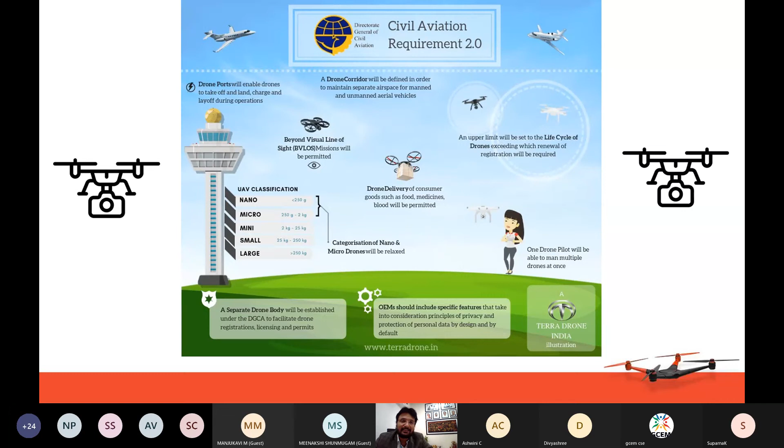Permissions to fly in controlled airspace can be obtained by sending a request to the ADC with the Flight Information Center. This is the Civil Aviation Requirement 2.0, the newer one recently sent, which you can download from the DGCA Digital Sky portal.

Nowadays it is mandatory to have a GPS return to home feature, in case your drone has a problem and has to come back, anti-collision lights, an ID plate with unique identification, and a flight controller with data logging capability. No permission, no takeoff - if they do not give you permission, you should not be able to take off your drone.

This is called NPNT. As per the Indian Constitution and IPCs, such as 287, 336, 337, 338 and other relevant sections, penalties are applicable as per the sections of the Aircraft Act. So you have to be careful with the Aircraft Act and the IPCs. These two govern the airspace, because so far we don't have exclusive laws for drones - we are using the Aircraft Act along with IPCs.

This is the latest RPAS guideline by the DGCA. If you want, you can take a screenshot of this, scan it, or visit the website dgca.nic.in/car/d3x-x1.pdf. This talks about the requirements for operation of remote piloted aircraft systems, RPAS.

So the rules are: don't fly the aircraft when it's crowded. Do not have anything weighing more than 7 kilos in total. Do not suspend or have any items there. Do not use hazardous substances. Do not drop or discharge any items.